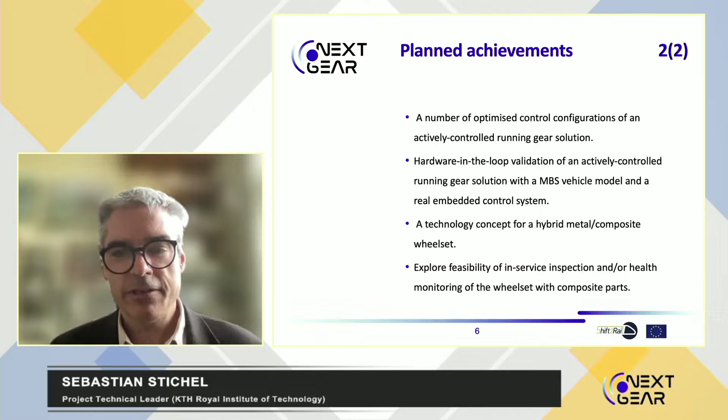The first one, the antenna bracket with additive manufacturing, gave a 60% weight reduction compared to an existing component. It's an example of how new manufacturing methods can provide shapes that are not possible with other manufacturing methods, and by that reducing weight significantly. That component has even been mounted, not only built but also mounted and tested on a Metro Madrid train. So regarding TRL, I would say we were definitely higher than 5 in that part.

Also, we developed, designed, and manufactured a carbon fiber composite frame, a second possibility for lightweighting, changing material in this case from steel to carbon fiber, and that frame is 50% lighter than a steel frame would have been. The third example, the hybrid metallic composite wheel set, promises even 60% weight reduction, an example of how more advanced materials could reduce the weight of future trains.

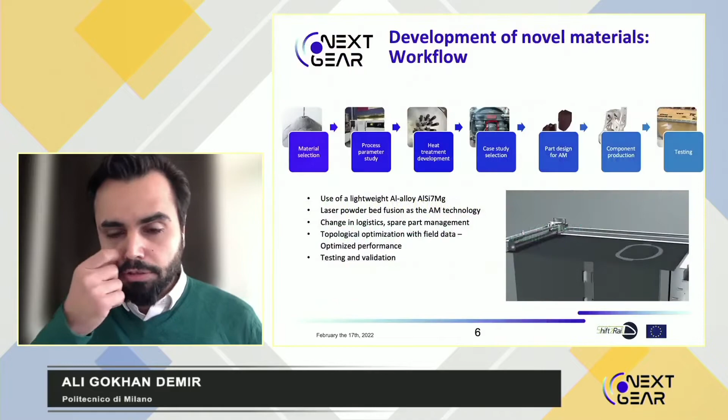In additive manufacturing, we have a lot of potential for different industries. In railways, these potentials have not been previously explored widely. One of the reasons is related to the fact that we have different stages of maturity in terms of materials available, manufacturing systems available, and the sizes of the components that we can make.

For that reason, the workflow of our task started from something different: the availability of the materials, the processes available, and then we set the scene for what we can do towards railway applications. This is why, in order to fulfill the requirements of our project, mainly related to achieving lightweight structures...

we went for aluminum alloys. We went for also arguably the most mature metal additive manufacturing technology, that is laser powder bed fusion, which you can see as an animation in this slide.

So we wanted to take our material, take our process, and develop a solution towards railway applications, which we found that the most suitable case for us was the spare parts. So for that reason, we wanted to see how much additive manufacturing could contribute in order to change the logistics, especially for producing these spare parts on demand.

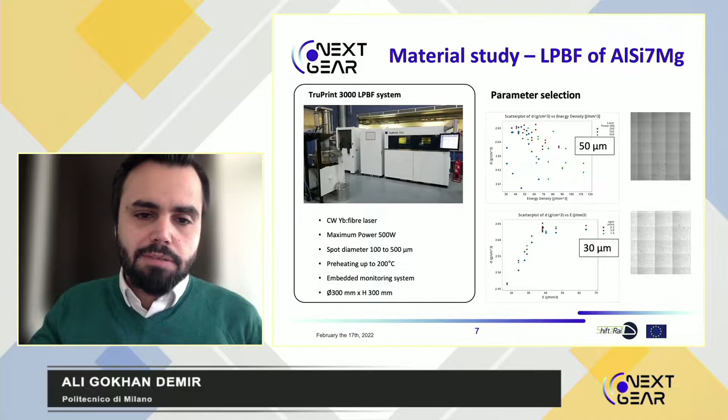So what we have done is also related to identifying a production cycle. In metal additive manufacturing, you essentially need to produce the part, and you need to also apply some post-processing. In terms of post-processing, we had to study the heat treatments.

Heat treatment is also a critical point in logistics. The idea is that if you produce a part where you need, or if you think about centralizing manufacturing, a heat treatment might be very tricky because of the size of the component, because of the furnaces that you need, and so on. So together with our colleagues in Rome, CSM RINA, we studied a novel heat treatment for the railways industry.

The idea was to make a heat treatment applicable to a decentralized manufacturing scheme that doesn't compromise the mechanical properties of the components that you make. Also considering the fact that we're going towards mid to large-sized parts for metal additive manufacturing, we don't want part distortions or any geometrical failures during the heat treatment.

For that reason, we studied a large experimental campaign for heat treatment process parameters. We varied the layer thickness, as I said before, and my colleagues in Rome studied new recipes for heat treatments of this alloy.

Going quickly into the details, my colleagues in Rome, together with us, studied the heat treatment options, starting from a standard aluminum alloy heat treatment, a T6, which could be applicable to conventional aluminum alloys. It considers a quenching process in water, which might be somehow detrimental for large parts that might bend and get distorted during this process.

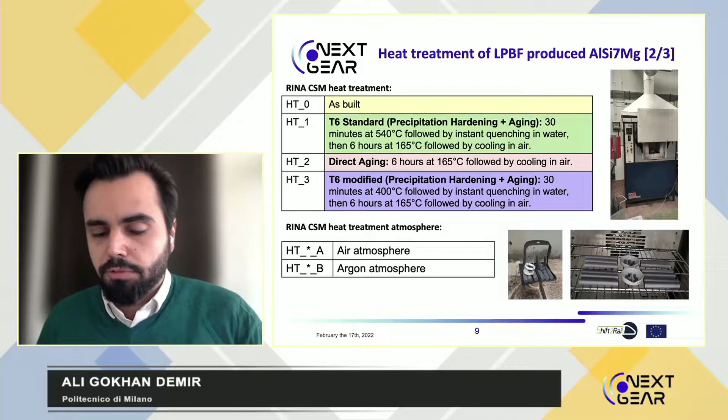They also considered a direct aging treatment and a modified T6 treatment. You can see the process parameters in detail, but the idea was aiming for adequate mechanical properties while trying to figure out a way to make the whole heat treatment process easier for decentralized manufacturing. We also considered whether we could reduce the gas consumption during the heat treatment, whether we can do this in air atmosphere or in argon atmosphere, which would potentially increase the costs.

Going into the final recipe of manufacturing this alloy for railway applications, we decided to go for quicker manufacturing in laser powder bed fusion by increasing the layer thickness, because we found out that the mechanical properties were still adequate after a heat treatment in air atmosphere.

The heat treatment was a direct aging heat treatment, where my colleagues showed the mechanical properties were very good. The post-processing time was reduced, and we avoided quenching, which is potentially good for the distortions that might happen during heat treatment. So this is one of the achievements of our task: we tailored the heat treatment for railway parts produced by metal additive manufacturing.

We then studied different parts which we could produce by laser powder bed fusion technology. Our colleagues in Metro de Madrid provided us with 7 different cases, and the first limiting factor was the size of the components. Here you see the way we tested these components in a virtual world to see whether we could produce them with the process and machine that we have.

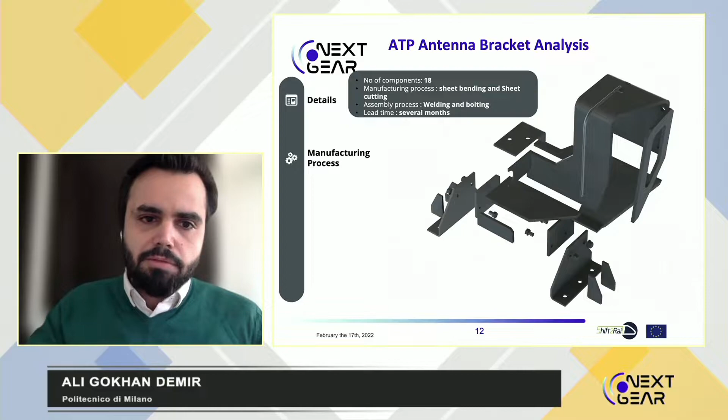I will go through the stages of how this part was and what it became by the end of the task. Our part is something hidden within the train. It is made of steel, weighs 26.2 kilograms, and is made using very conventional manufacturing techniques — sheet bending, cutting, welding, and bolting. We have 18 components in order to manufacture this part.

So the idea is we took this part, used the actual vibration and acceleration data of the train, and transferred them into load cases. The load cases were used to understand how the part was actually behaving under these loads, and finite element modeling allowed us to see the benchmark.

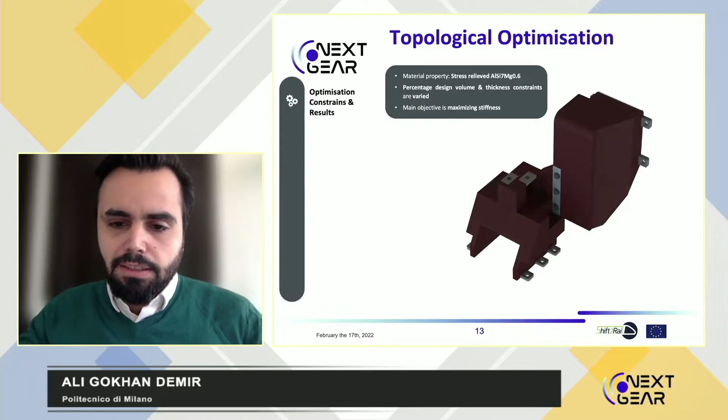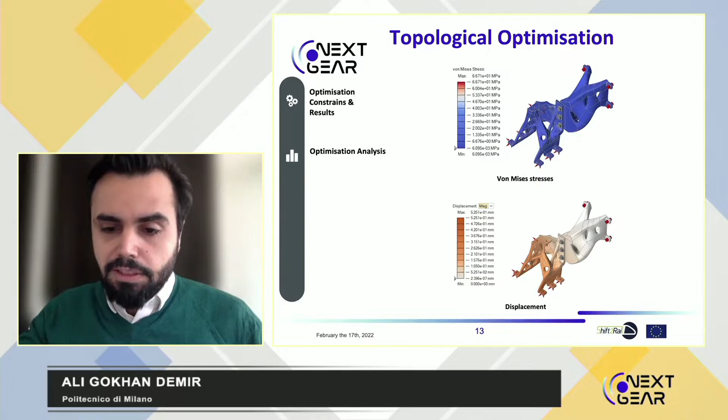Then we took the part and defined our constraints in terms of how many parts we want, the assembly joints, and so on, using this design region to go for a topological optimization. Topological optimization matches very nicely with laser powder bed fusion, but the optimization results are not really optimal for production. So we had to continue the design with modifications, and the final design was once again tested in finite element modeling, allowing us to see that we maintained stiffness while reducing the weight quite significantly.

Last but not least, the part was also modified for manufacturability by laser powder bed fusion. We made some basic modifications in order to make the part producible as fast as possible.

This is the digital image of the part that we designed, and this was manufactured in Milan. So putting everything together, original compared to AM, at least on a calculation basis, we saved

60% of weight. We reduced the parts to be assembled from 18 to 2. From design to manufacturing, we reduced the time from several months to a few weeks. And essentially, we made a part that was better than the conventional one, at least in terms of how it was designed.

So another achievement is that we designed a spare part for the railways industry, which was topologically optimized. I'm going to go through some of these testing results rather quickly, because this somehow exceeded our expectations during the project.

So once the part was made - and maybe I should also mention that this was through the pandemic - we also found out once again that additive manufacturing adds resilience to logistics and manufacturing overall.

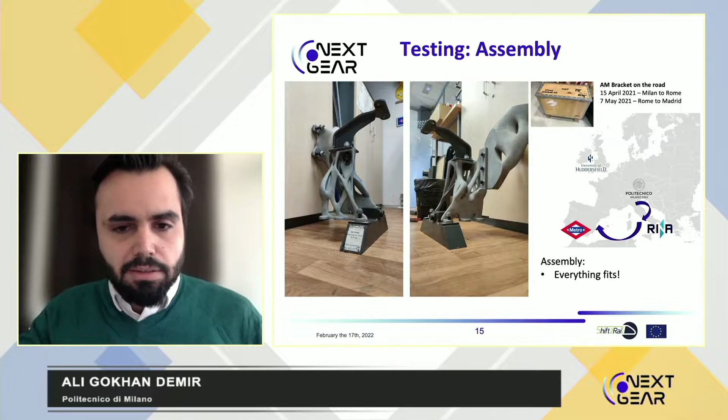Then the static testing was applied by our colleagues in Madrid, pulling our antenna brackets statically in different directions. First of all, very humbly, we needed to see if anything broke. Nothing broke, which was very good.

Then we gathered the data in terms of displacement and stiffness of the part, and we compared it with our calculations. And this was the validation of our part in a static way.

The very nice thing about NextGear as a project is that the partners are very enthusiastic about what we have been doing. We didn't stop. Very recently, the part was also tested on track, which is an amazing opportunity for all of us.

In Madrid, our colleagues mounted the new antenna bracket together with the conventional one. We gathered vibration data on both of them, and we are still comparing these results for future communications coming out from this task.

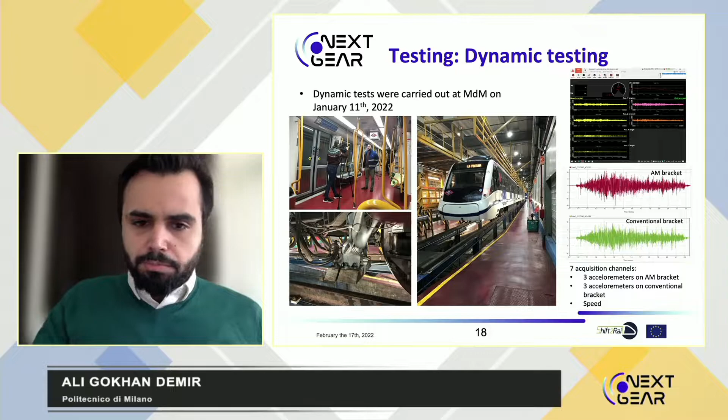So, last but not least, this is just to show where we started and where we came to. The last achievement, I would say, is that we were able to actually start from scratch, make a real railway spare part, calculate it, manufacture it by additive manufacturing, and verify it.

Thank you very much.

Really interesting piece of work there, developing a real product that is now being tested and hopefully will start to be used. Okay, so the next section will be presented by Per Wennhage. Per is going to describe the composite frame which was manufactured.

Thanks, Per. KTH. Sorry, second one to make the mistake with the muting.

My name is Per Wennhage. I am an associate professor at the Royal Institute of Technology in Stockholm, in lightweight structures. I have been leading this subtask of the composite frame, and I will share with you some of the results from our side.

So the partners in this subtask have been, apart from us, Huddersfield, RINA, Metro de Madrid, and Bercella. Bercella is an Italian company, a manufacturer of composite structures.

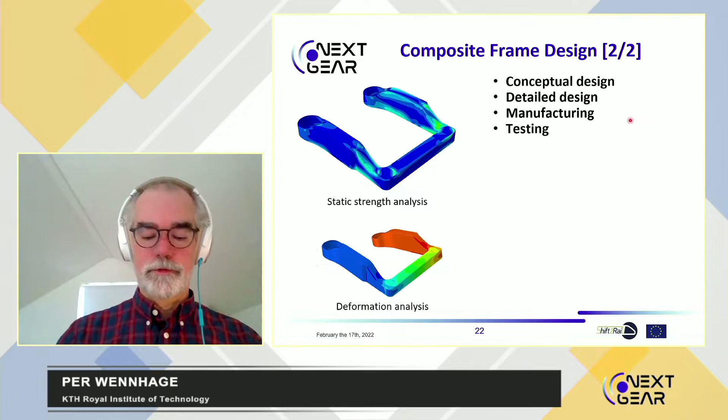Quite a lot of simulations were also made together with the vehicle dynamics simulations, where we could see how the frame works together with the other suspension components to contribute to safety and comfort in the vehicle.

After this, the design was determined and we had a manufacturing plan. This was done by Bercella in Italy, and it was a 3-stage process. This included a fairly large mold where the frame was first manufactured. Inside this blue area is the shape of the frame, and carbon fiber layers are placed inside and cured.

Then a number of metal inserts were used to introduce high loads for where the coil springs should be, in these buckets so to speak, and for different other attachments. The one on the far right, the metallic part, is for the introduction of fastening of the axle boxes. The idea is that all this metal part is embedded into the carbon fiber, but there are protruding elements that provide a metal-to-metal interface for bolting the axle box.

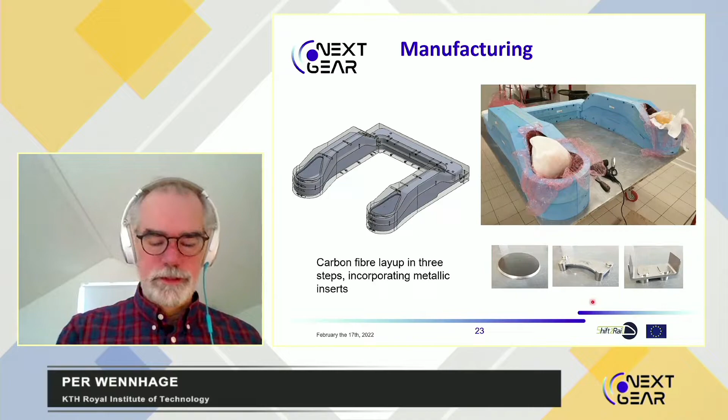The frame was shipped to our lab in Stockholm for testing. This is my colleague Anton, who did most of the analysis and also major parts of the testing, which we did together. The final component weighs in at 76.5 kilograms, which makes it manageable for 2 people to carry around the lab.

It was quite nice - slightly above the calculated weight, which is not unusual for a first composite prototype, but within limits. We compensated for this in the models we used to verify the structure.

A test program was set up to verify the frame's properties. We wanted to characterize the structural flexibility and particularly the torsional stiffness of the frame, because we wanted it to be able to act as an anti-roll bar. So it shouldn't be super stiff, but at the same time, under other load conditions, it should be stiff. We wanted to see if we had managed to do this with the design.

We also wanted to see that all the finite element models we had were accurate and modeling the right thing. To verify that we could take the loads, we designed it to operational loads taken actually from standards for rail vehicles that are being used today.

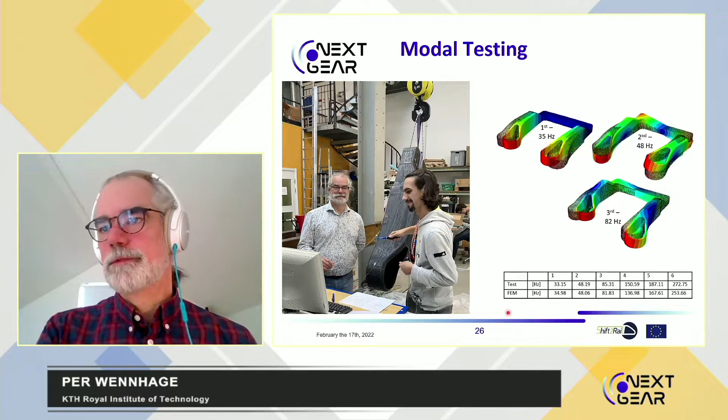And the results were really encouraging. We could see that at least for these first modes, these results are really, really good. After that, the different tests commenced, and typically the procedure was that we set up a test. This is for vertical testing.

We have a load point at the middle of the orange colored beam that will press down with a hydraulic cylinder, and then we measure the displacement at a lot of different positions. We pick out the same position in the finite element model, where we make a model of this particular test, so we can get a fair comparison. There are a lot of measurement devices here that measure displacement at different points so that we can subtract any rigid motions of the frame during the test.

This was an initial vertical test to about a quarter of the maximum load, and as you can see, the agreement is quite good.

Then we did a twisting test where we loaded a quarter of the frame and the other parts were restrained. This is to simulate the action of an anti-roll bar, to see if we got the stiffness right. Again, the finite element model we used was a model of the actual test, the way it looked here. As you can see, the results are also really encouraging. It may be slightly stiffer than anticipated, but not way off, so we were very happy with this.

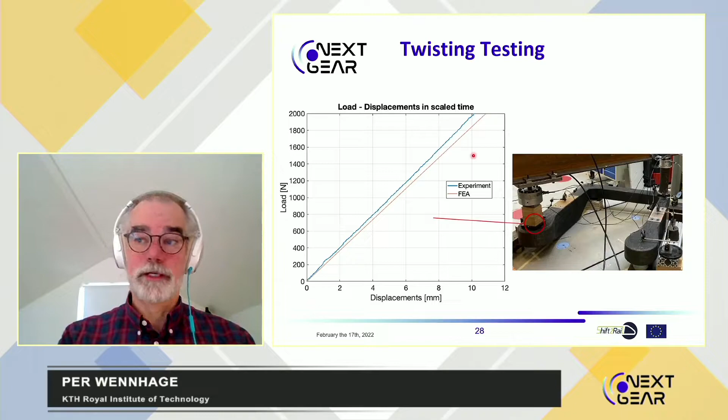The final test we did was to load it vertically to the design load. We did this last to be sure we didn't break anything before the others. So we loaded it to a total load of 20 tons, as if it was mounted on the vehicle — this is the vertical compression case.

You can sometimes hear when a composite structure is about to break, some cracking. I didn't hear any cracking at all around this one. My hearing is quite good, actually, so I couldn't hear any cracking here.

So what you see here is Anton, again, applying the load to the frame carefully and slowly. I'm standing in the background in a typical supervisor pose, surrounded by my PhD students. This is always an event in our lab when we test something big. On a completely different note about lightweighting, I've probably lost 16 kilos since this picture was taken, and my weight is now the same as the composite frame, actually. Funny.

You see the results here match the finite elements really well, almost all the way up. We had a little bit of a problem with interference on one of the measurement devices, so it deviates a little towards higher loads here, but we measured on both right and left side, and on the other side it looks really fine.

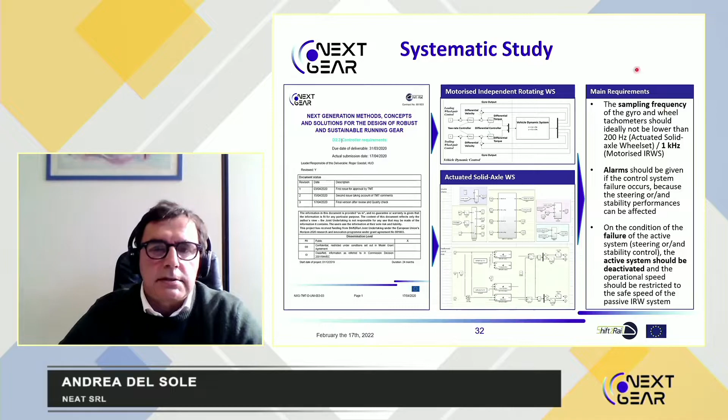Another redundant system, with two different halves of the system, will be shown in the video that will be streamed during the break.

There is also an ancillary communication computer running a dedicated Linux distribution in charge of non-critical tasks, and of course the power supply unit. A lot of tailoring has been done, especially on our operating system, in order to achieve the required 1 kilohertz duty cycle, which, to the best of our knowledge, is absolutely uncommon in railway applications.

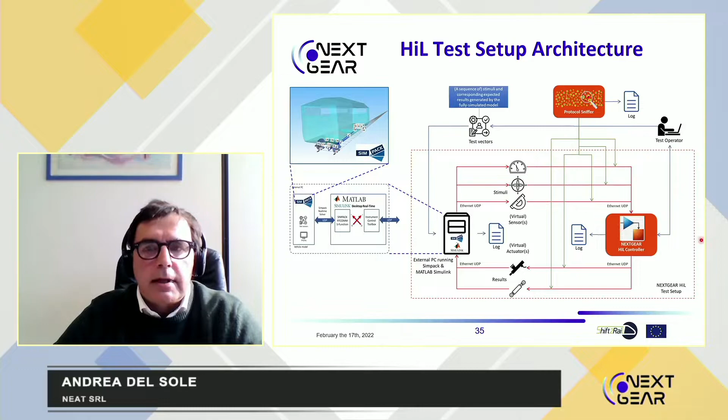This is the real setup: we have the PC and, on the right, the controller connected through an Ethernet port. We access this setup remotely, so we can run different test campaigns from our premises or anywhere.

The testing strategy we followed is based on three different simulations to compare vehicle dynamic results, given the track case of curve negotiation, where the truck approaches the curve. We compared three systems: a passive one with no control, an active one with the designed Simulink controller, and an active one with the hardware-in-the-loop physical controller in the middle. These are the results for the wheel set attack angle across the three simulations.

Both wheel sets of the passive vehicle system show very large attack angle during curve negotiation, whereas the controlled leading wheel set in both active cases has a much smaller attack angle compared with the passive one. The trailing wheel set without control has almost the same attack angle as the passive one.

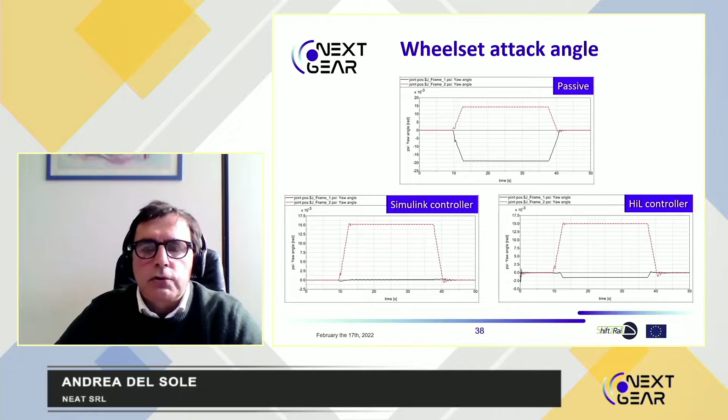The wear of the controlled leading wheel set is significantly lower than in the passive scenario, and the simulation shows that the wear index can be reduced by up to 94%.

In contrast, the uncontrolled trailing axle, wheelset 2, has almost the same wear index as the passive vehicle. So this improvement in the vehicle dynamic performance of the controlled leading wheelset is quite significant according to our analysis.

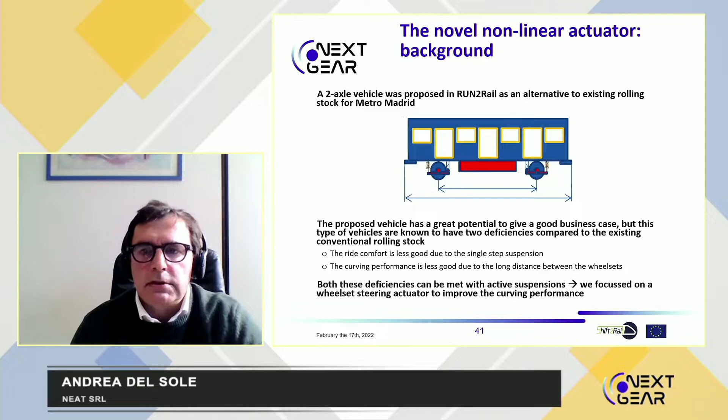Let's now move on to presenting the results for the actuator. In the Run2Rail project that preceded our NextGear project, a two-axle vehicle was proposed as an alternative to the rolling stock currently used in Metro de Madrid. This vehicle, despite having great potential from the business point of view, has possible deficiencies in ride comfort and curving performance, which could be overcome, in our opinion, by introducing wheelset steering actuators. This is what we are talking about now.

Here we are showing the basic steering principle. The goal is to obtain a favorable angle for the wheelset in curves and thus reduce wear, and in general, not to control stability.

This is the test setup for the actuator. On the right there is the diagram, and on the left, the real setup in the laboratory. On the bottom we can see the control diagram showing the principle of functioning with a single driving circuit.

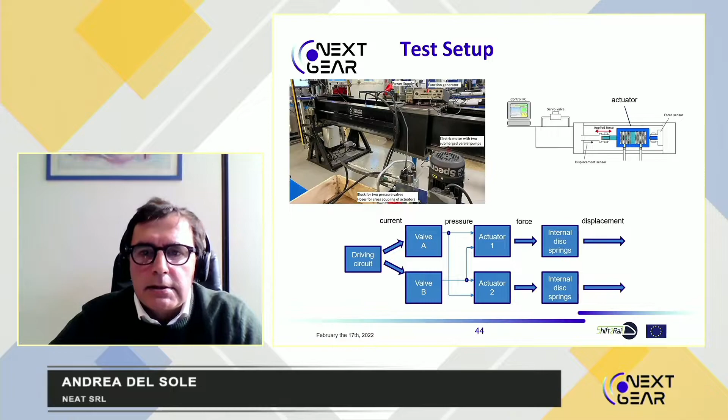A sophisticated model has also been designed, shown on the diagram on the left. Sorry, it's quite small, but it's complex, so it couldn't fit into a single slide. This model simulates the behavior of the actuator system, taking into proper consideration the friction elements and the connection bushing.

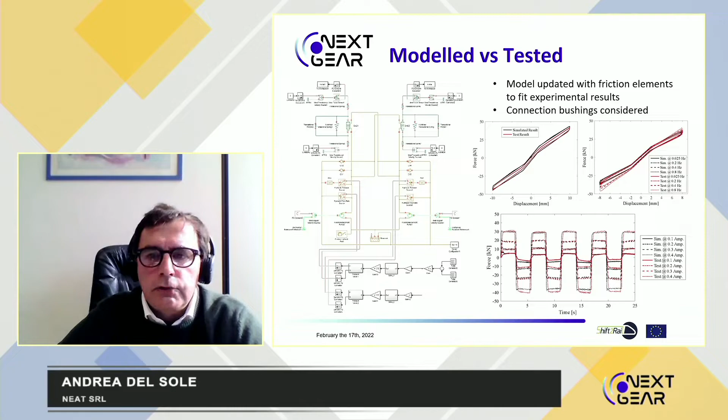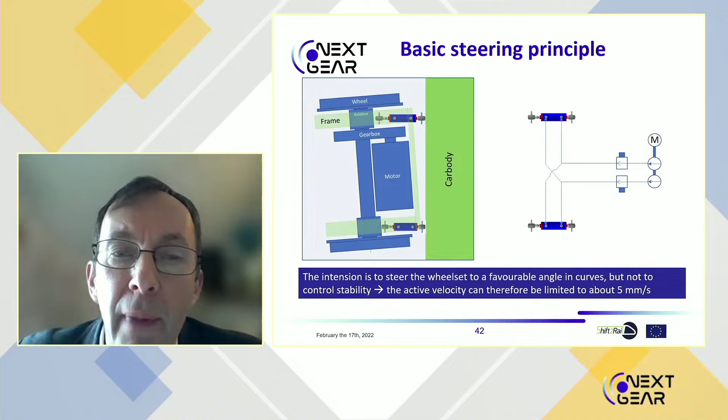But the question seems to be about the maximum forces, which, I'm sorry, I don't quite understand the point of the question. Maybe it's questioning whether the actuator can apply enough force, or whether we tested it to a high enough force in the testing.

Yeah, it's probably referring to the graph on slide 45, isn't it, where the force is going up to 45 kilonewtons in each direction. My feeling is that's enough force, but I'm sorry, I don't quite understand the question.

Perhaps can we take that offline? Yeah, I think it's better. In any case, there are no more questions.

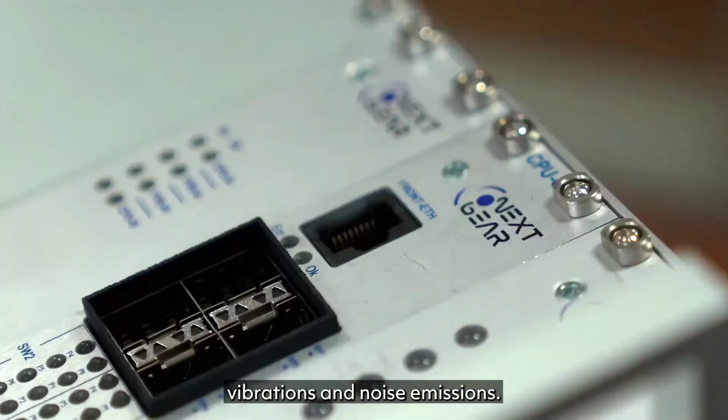A new generation of running gear is very important to achieve the ambitious goals set by Shift2Rail for future European rail vehicles. This includes significantly reduced life cycle costs, improved reliability and energy efficiency, and also reduced vibrations and noise emissions. NextGear therefore develops a variety of innovations for future running gear.

The reduction of the mass of the wheel set is related to the importance of reducing the mass of all the parts coming into contact with the track. This helps reduce the damage to the rolling stock and the rails, and also reduces the noise and vibration coming from the vehicle.

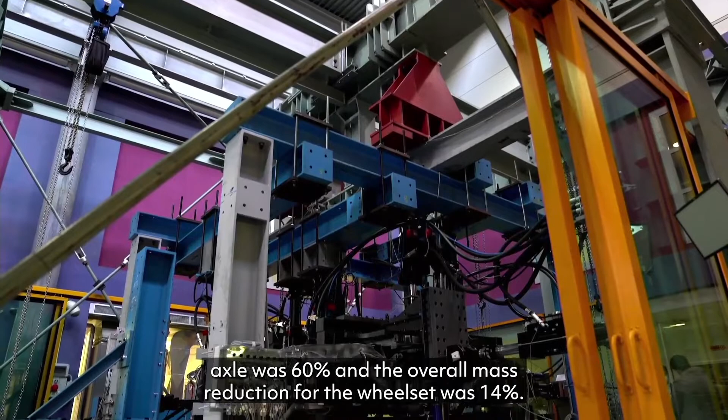In Work Package 3, we developed a technology concept of a hybrid metal composite axle. The weight reduction we achieved for the axle was 60%, and the overall mass reduction for the wheel set was 14%.

To develop this hybrid composite metal axle, we had to face a lot of challenges. First, we had to design the structure and optimize the fiber layup, then study the connection with the metal parts, the bearings, the wheels, and the position of the brakes. We also had to consider feasible ways of inspecting this complex part and performing structural health monitoring.

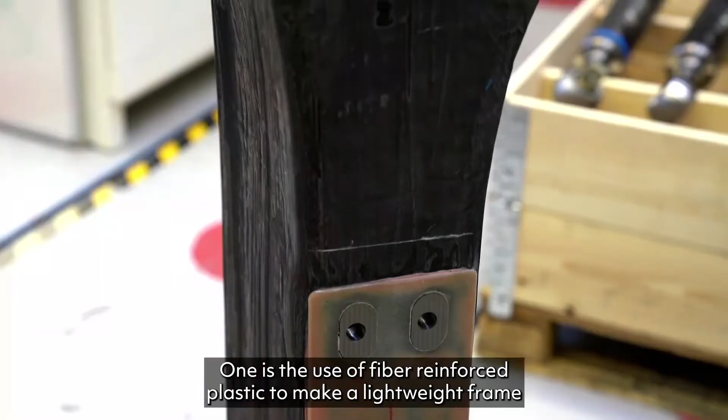There's huge potential from using new materials, new components, and new methods of operating these components. In Work Package 2, we've been investigating two potential improvements: one is the use of fiber reinforced plastic to make a lightweight frame within the bogie of the vehicle, and the other is use of additive manufacturing methods, where we make a novel component which is lighter, more robust, and potentially more reliable than existing components.

We are also developing a high safety integrity level controller. This controller is necessary so that we can control the different active components in the suspension. Using active components allows us to improve the performance of the suspension, for example by reducing damage on the track and reducing the energy consumption of the vehicle.

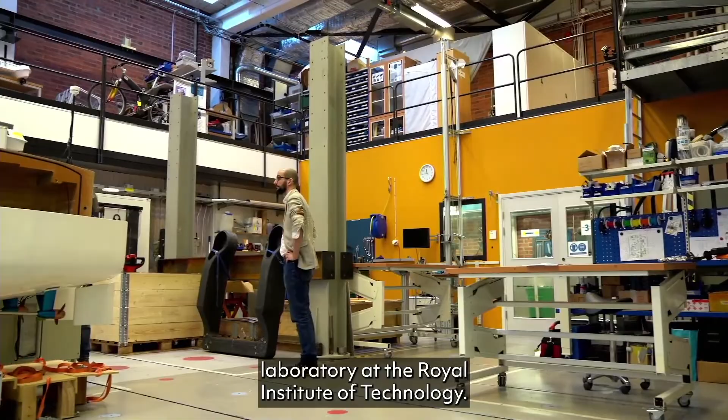A challenge in using composite materials in running gear is to prove that they can fulfill all the requirements on lightweight vehicle components. This has been addressed in Work Package 2 through the conceptualization and design of a lightweight carbon fiber frame, tested here in the Lightweight Structures Laboratory at the Royal Institute of Technology. The work has demonstrated that carbon fiber composites can be used as part of a novel running gear, achieving significantly reduced mass and better or similar performance to a conventional running gear.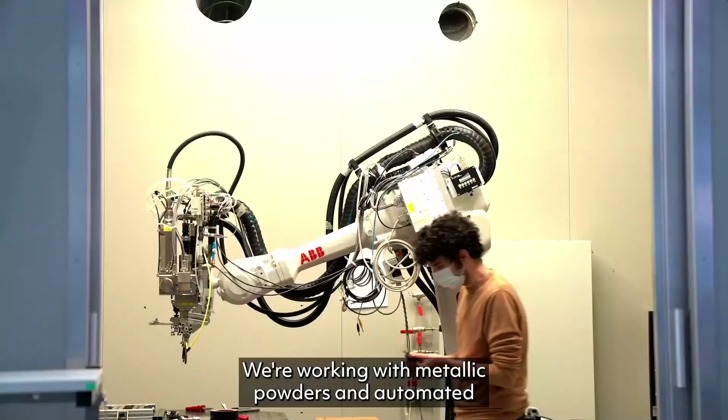Metal additive manufacturing can provide several benefits to the railway industry. We're working with metallic powders and automated machines to make parts in a layer-by-layer fashion. In NextGear, we concentrated our efforts on understanding how we could change the manufacturing of spare parts, especially where and when required, using digital files.

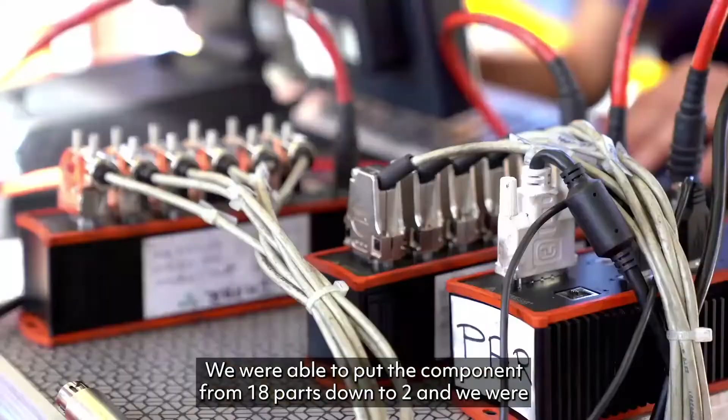We collaborated with Metro de Madrid and redesigned their part using real railway data. The component was manufactured here in Milan and tested on the track in Madrid. We achieved a 60% weight reduction of the component, and we were able to reduce it from 18 parts down to 2. We manufactured it in less than 2 weeks compared to a few months in the conventional case. This was a nice way of showing the railway industry the benefits of metal additive manufacturing, which we hope will be used more often in the upcoming years.

The use of active elements may lead to a better trim of the car body approaching curves by reducing centripetal acceleration, thus reducing wear on both wheels and tracks. The suspension system, both sensors and actuators, can be monitored to check efficiency and detect anomalies in their behavior. In the project, we set up a hardware-in-the-loop controller with simulated sensors and actuators running at 1 kHz. A future improvement could be introducing dedicated I/O boards interfacing real sensors and actuators.

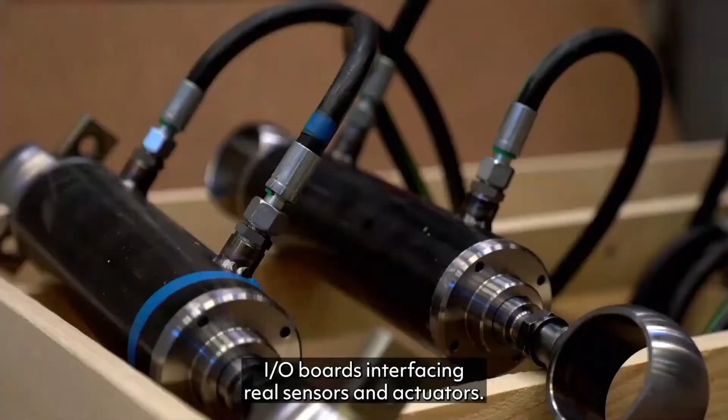The universal cost model is a simulation framework that enables comparison of life cycle costs of different running gear types, especially their impact on different railway system stakeholders. The UCM allows us to check the pros and cons of novel, innovative running gears at the system level. The UCM does not simulate the innovations directly, but simulates the impact of those innovations on different cost-generating concepts. This means that for the NextGear project, we could not model all the innovations.

Instead, we explained and broke down the process of how a new innovation should be implemented in the UCM in order to calculate its benefits, pros, and cons. The main challenge is to achieve the right balance between accuracy and user-friendliness, because different stakeholders have different expertise levels in these simulation techniques and different expectations of what a good level of accuracy and usability should be.

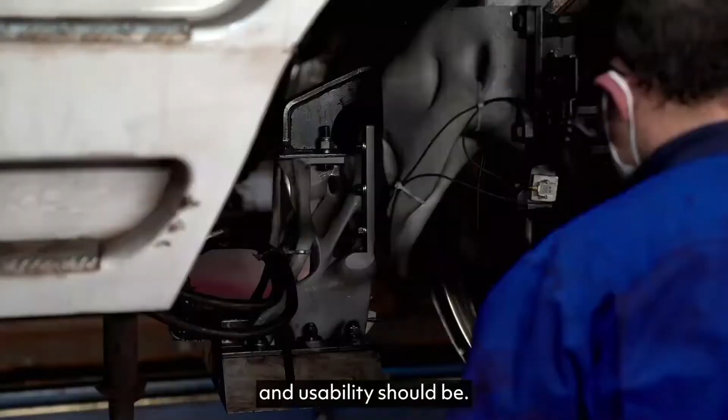Additive manufacturing and bogie frames and wheel sets based on carbon fiber materials can significantly reduce the weight of future running gear. The controller and the innovative actuator developed in the project show the performance of active suspension in rail vehicles, which will improve performance and enable new vehicle concepts. The positive impact on life cycle costs can be verified with the universal cost model also developed in the project.

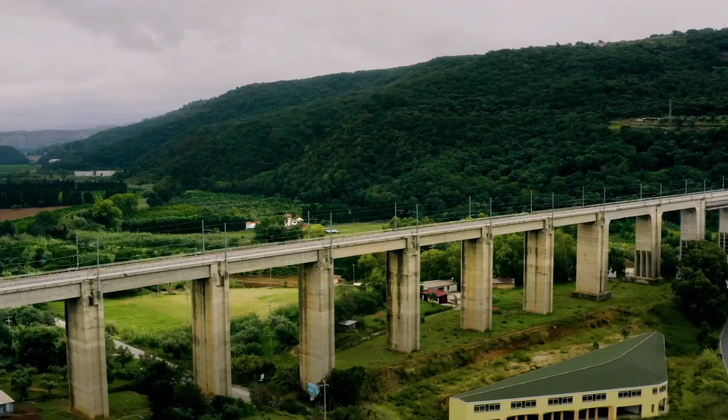A new generation of running gear is very important to achieve the ambitious goals set up by Shift2Rail for future European rail vehicles. This includes significantly reduced life cycle costs, improved reliability and energy efficiency, and also reduced vibrations and noise emissions.

NextGear therefore develops a variety of innovations for future running gear.

The reduction of the mass of the wheel set is related to the importance of reducing the mass of all the parts coming into contact with the track. This helps to reduce the damage of the rolling stock to the rails and also reduce the noise and vibration coming from the vehicle.

So in Work Package 3, we developed a technology concept of a hybrid metal composite axle. The weight reduction we achieved for the axle was 60%, and the overall mass reduction for the wheel set was 14%. To develop this hybrid composite metal axle, we had to face a lot of challenges.

First of all, we had to design the structure, we had to optimize the fiber layup, but then we had to study the connection with the metal parts.

And the connection with the bearings, the wheels, the position of the brakes. Then we had to consider feasible ways of inspecting these complex parts and also ways to perform structural health monitoring of the parts.

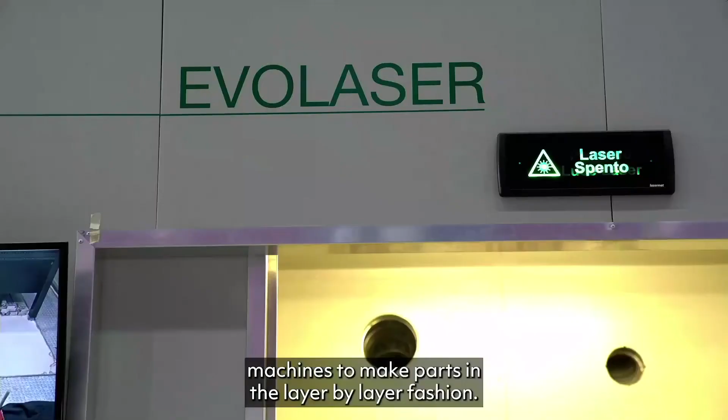Metal additive manufacturing can provide several benefits to the railway industry. We're working with metallic powders and automated machines to make parts in a layer-by-layer fashion. So in NextGear, we concentrated our efforts especially in order to understand how we could change the manufacturing of spare parts.

Especially where required and when required, using digital files. So we collaborated with Metro de Madrid and we redesigned their part using real railway data.

And the component was manufactured here in Milan and tested on the track in Madrid. So we achieved a 60% weight reduction of the component. We were able to bring the component from 18 parts down to 2.

And we were able to manufacture it in less than 2 weeks compared to a few months in the conventional case. So this was a quite nice way of showing the railway industry the benefits of metal additive manufacturing, which we hope will be used more often in the upcoming years.

The use of active elements may lead to a better trim of the car body approaching the curves by reducing the centripetal acceleration and thus reducing the wear of both wheels and tracks.

Moreover, the suspension system, both sensors and actuators, can be monitored to check the efficiency and detect anomalies in their behavior. In the project, we set up a hardware-in-the-loop controller with simulated sensors and actuators running at 1 kHz.

A future improvement could be introducing dedicated I/O boards interfacing real sensors and actuators.

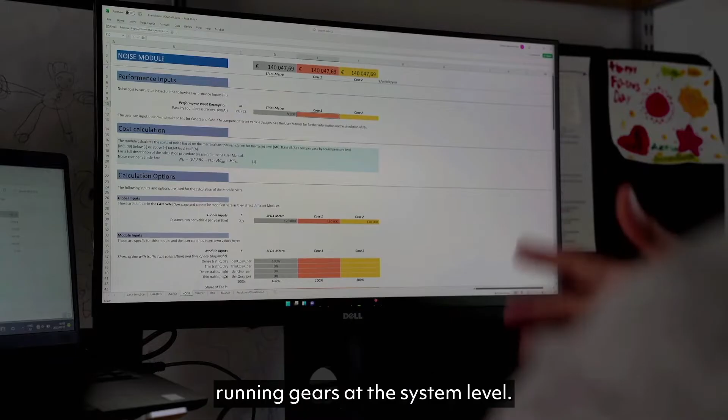The UCM does not simulate directly the innovations, but what it does is simulate the impact of those innovations in different cost-generating concepts.

For the NextGear project, we could not model all the innovations. What we have done is explain and break down the process and how a new innovation should be implemented in the UCM in order to calculate their benefits, pros and cons. The main challenge is to achieve the right balance between accuracy and user-friendliness, because different stakeholders will have different expertise levels in these simulation techniques and different expectations of what a good level of accuracy and usability should be.

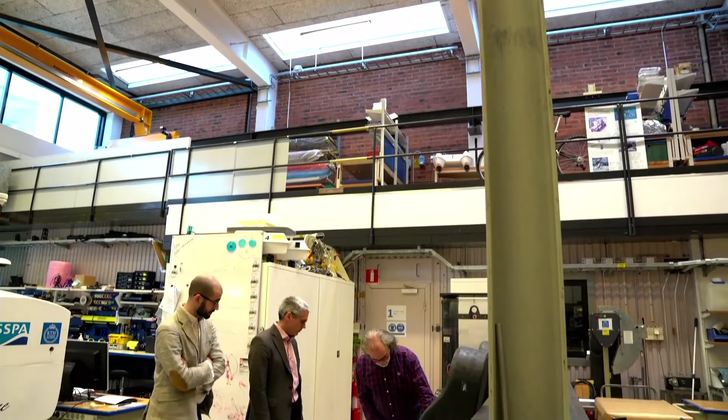Additive manufacturing and bogie frames and wheel sets based on carbon fiber materials can significantly reduce the weight of future running gear. The controller and the innovative actuator developed in the project show the performance of active suspension in rail vehicles, which will improve performance and enable new vehicle concepts. The positive impact on life cycle costs can be verified with the universal cost model also developed in the project.

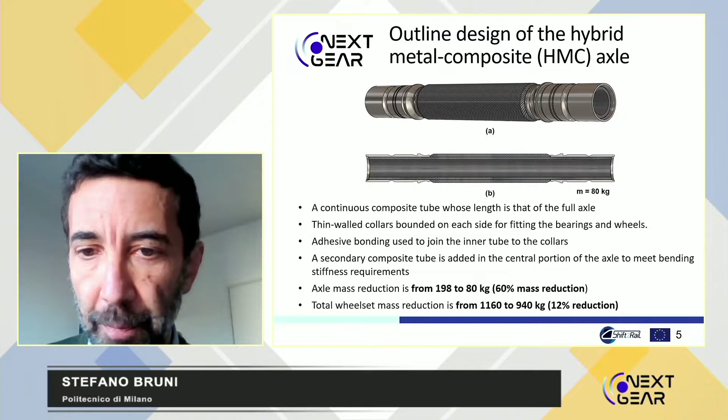And this picture shows how the complete concept for the wheel set with the hybrid metal composite axle, this acronym HMC standing for hybrid metal composite, looks like. So you see the composite tubes and the collars providing the bearing seats and the seats for the press fitting of the wheels, and then the wheels. You see the disc brakes are not shown, but you see where they would fit into the wheels.

So this was the first part of our work, and then of course we wanted to analyze this concept and its feasibility by looking into different areas.

The first one was a detailed structural design of the axle and an optimization of the layup. Then we had to look into a proper solution for the bonded joint joining the metallic collars to the composite part of the axle. We had to investigate the manufacturing process and make sure that there is a suitable manufacturing process that can be used to produce this component, and also get an initial estimate of the manufacturing costs. One very important point was about non-destructive testing and structural health monitoring to check the structural integrity of the axle.

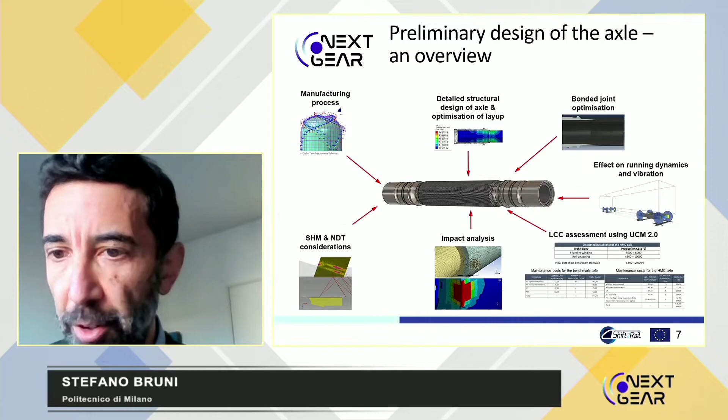Going a little bit more into the detail of the structure design and optimization, we came up with a detailed design for the steel collars. The philosophy here is to let the steel collar take all radial and circumferential stresses related to the press fit of the wheels and bearings, and leave to the composite only the role to bear the bending stresses and realize the required bending stiffness. We don't have much torsional stress in this case because this is a trailed wheel set, and at the same time the brakes are mounted on the wheels, so there is not much torsion being transmitted through the axle.

One important point was making sure that the hybrid metal composite axle could meet flexibility or bending stiffness targets, for which we used the steel axle as a reference. That was the part of our work where we realized that by just using the inner full-length composite tube, we would end up with a possibly too flexible axle. It may be a subject for further investigation whether one could accept this higher flexibility as long as it is not impacting the structural resistance of the material. Here, the problem was not really with the maximum stresses exceeding the limits, but rather with the maximum bend deformation exceeding some limits that we decided internally in our work.

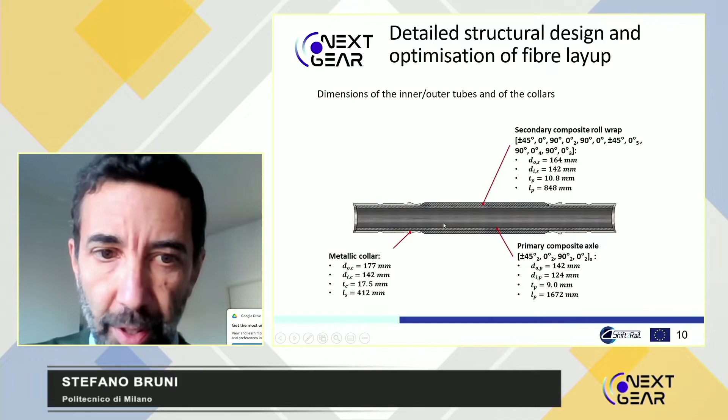Nevertheless, we could solve this issue by adding a secondary composite tube and by optimizing the layup of the primary inner tube and secondary outer tube in terms of the number of plies, thickness of the plies, and so on. This led us to a final, frozen design for the complete hybrid metal composite axle, which is summarized in this image, where you see basically the directions of the fibers, the thickness of the different components, and the main geometric properties.

In terms of the joining of the metallic collars to the primary and secondary tube, this was another very important and time-consuming part of our work because this is totally new, and of course we wanted to design a solution which is completely compatible with the stresses that need to be exchanged between the metallic and non-metallic parts in the axle. This was done by means of finite element models and finite element analysis. We found that it is particularly critical to ensure a smooth transition where the metallic collar transitions into the part of the axle which is only made of composite material.

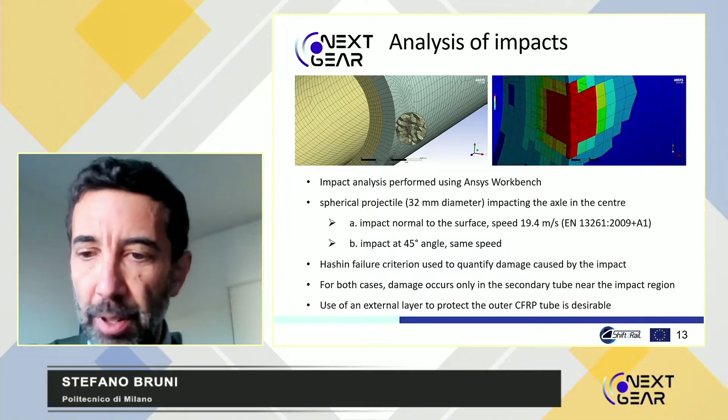we found that this would be certainly desirable. This is a solution that Lucchini is already adopting in some cases for steel axles, like a non-metallic covering layer protecting the outer surface of the axle from impacts. So this could also be of interest in case a composite axle like this one could be brought into service.

Another part of the work was related to the manufacturing process. Here there are basically two manufacturing methods that can be envisaged for this application. One is roll wrapping, so you have a sort of pre-impregnated fiber, which is wrapped over a mandrel to produce the tube, which is then cured and treated to produce the final composite part in the axle.

The other manufacturing method is filament winding. So by means of a kind of automation process or robotic system, filaments of carbon fibers are wound over a mandrel, and then the external parts are cut, producing the tube.

The benefit with roll wrapping is that because the stresses in the composite tube are mainly due to bending, roll wrapping allows the fibers to be aligned in the axial direction of the tube. This means there's a chance to maximize the stiffness over mass ratio, so you get the highest bending stiffness for a given mass of the tube.

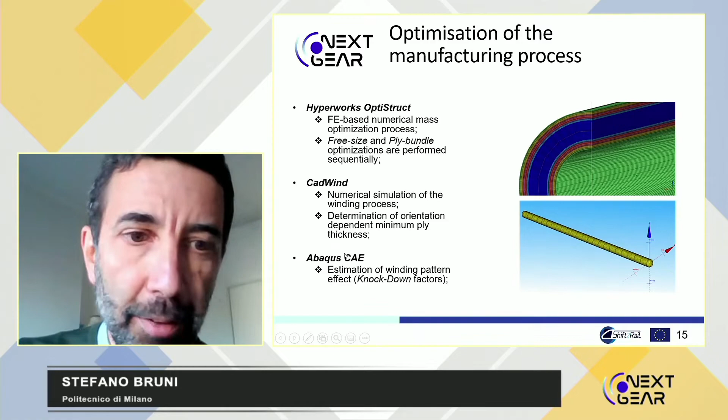So our work was to find out what could be the best filament winding process, which would provide a bending stiffness very close to the roll wrapping solution, yet enabling the use of this filament winding manufacturing process. This was done by a combination of optimization methods with HyperWorks, simulation of the winding process by a specific software CadWind, and finite element simulations.

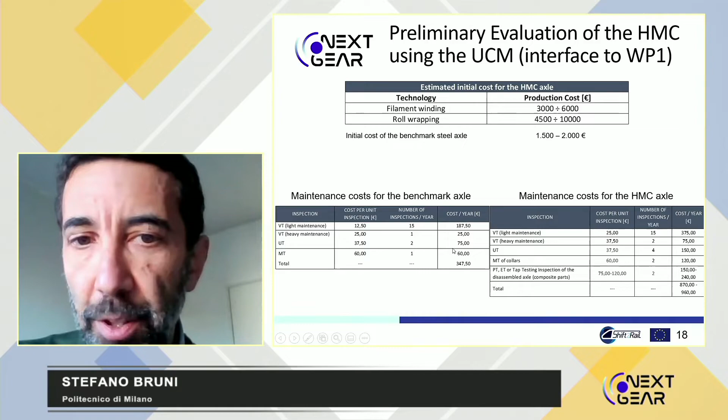We had an estimate of the production cost, split into two cases for filament winding and for roll wrapping, and you see that roll wrapping leads to a significantly higher cost. We also had an estimate for the initial cost of the steel axle—of course there is a difference, and this is unavoidable, but it's not a tremendous difference. We also had a complete evaluation of the difference and impact on maintenance costs on a yearly basis.

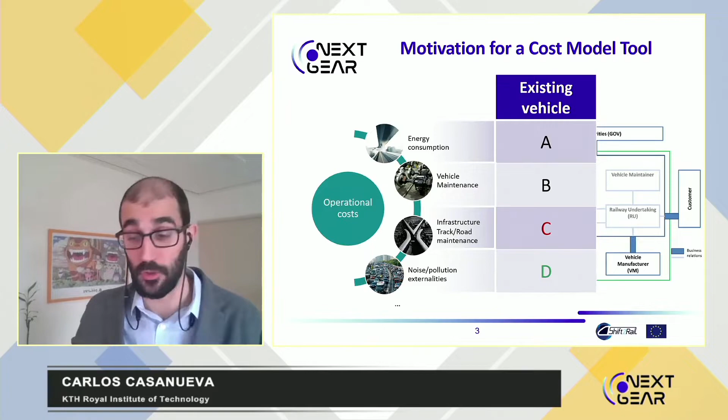So if you innovate and you have an innovative vehicle, you will definitely have different initial costs, different operational costs, and different end-of-life costs. That is rather simple in a way, except that those costs sometimes come to different stakeholders in the railway system. So an innovation can be paid by one stakeholder, but the impact is felt by different stakeholders. An example here is energy consumption or vehicle maintenance, which are usually costs assigned to operators, while infrastructure damage is a cost taken by the infrastructure managers, and noise and pollution are externalities or societal costs. So for these innovative vehicle benefits, one has to be able to evaluate these costs in a good way in order to justify these changes.

Now, exactly the UCM, the Universal Cost Model, was a methodology developed in Roll-to-Rail, and it is intended for evaluating how a discrete improvement or change in the running gear impacts the life cycle costs of the whole railway system. There are two parts to it: one is the methodology, and the other is the tool. The methodology covers the methods that you need to use in order to simulate the performance inputs, and the tool is how you transform those cost-generating inputs into actual costs.

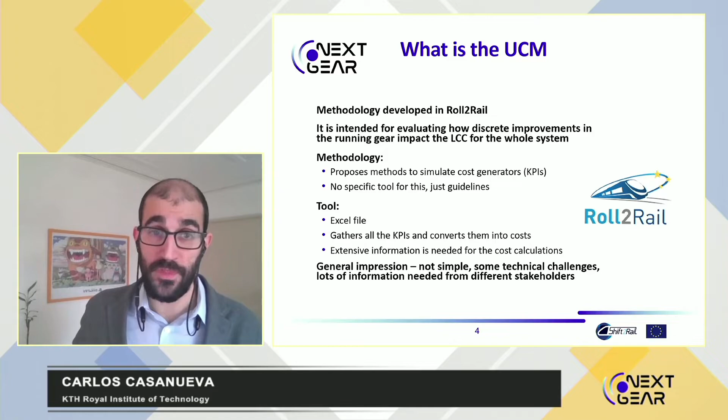The general impression from this project, or the feedback after Roll-to-Rail was finished, was that it was not a simple tool. There were some technical challenges, and there was a lot of information necessary for different people to be able to use it. So then, this is how it usually looks like.

The methodology is a set of rules and guidelines for simulations, and the tool is an Excel file. The interaction between those two is basically that there are some inputs to the simulations. The user should simulate some variables that are called performance inputs, and those performance inputs will be introduced in the tool in order to get a final set of costs.

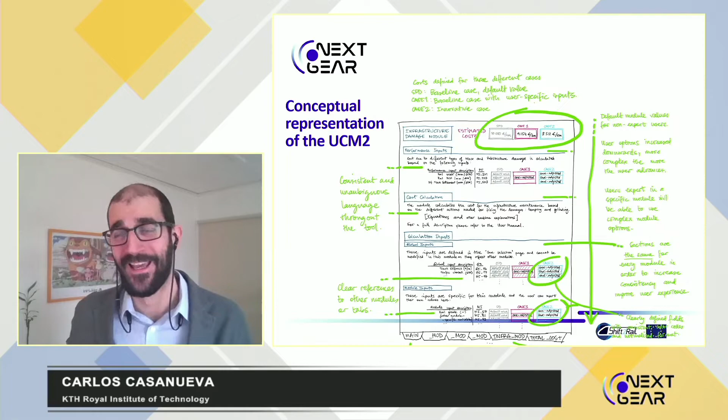Eventually what we did is try to conceptualize all that in one concept design, or conceptual representation, of what the UCM should be. And if COVID was good for something, it was for doing brainstorming workshops. We had to do this digitally with all the partners involved, and it was not easy. But we eventually came up with this conceptual design of the universal cost model, where we basically took the different things the partners were asking for systematically and tried to implement those in a sketch way.

So there are some main things here I would like to highlight. One is that the complexity of the modules was something addressed quite early, meaning that some people would be able to do stuff at a more complex level or not. So what we created is a way of adding complexity vertically, so that whenever one opens one of these modules for analyzing a subsystem, it can be used as is by default without changing anything.

But if one is an expert, they can go down and down and find more and more options that can be tweaked and used at a much more expert level. There is also a learning curve - there's a main initial tab and a final cost-gathering tab, but in between there are all the different modules of the different technical parts of the system. We ordered them so that the easiest modules come first and the most complex ones come at the end, so that one can learn as they go.

And the main thing is this comparison availability. In the previous version, you only got one result. We allow users to implement 3 cases. One of them is a default SPD case. SPDs are system platform demonstrators that come from the whole Shift2Rail framework, from Impact.

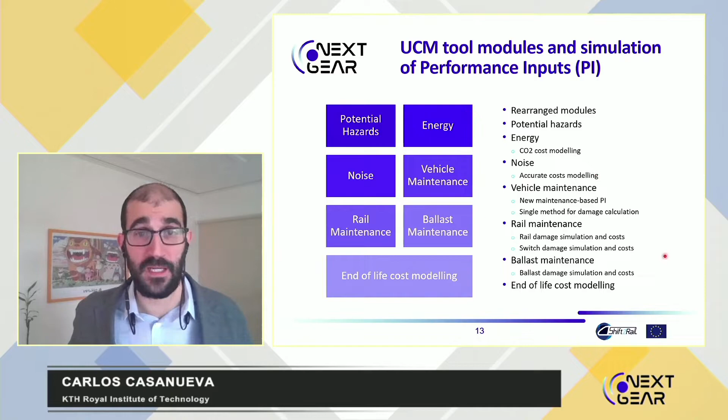We have different modules, I'm listing them here: potential hazards, energy, noise, vehicle maintenance, rail maintenance on one side and ballast on the other side, so they are separated for the infrastructure, and then a final end of life and cost modeling tab. We rearranged them a little bit in order to make them simpler. We added some things that I will go through right now, one by one.

The first one that I would like to address is the energy and noise modules, and there are no changes in the simulation models in those cases, but the economic analysis, or how you calculate the costs from those, have been improved a lot.

So for instance, the CO2 cost or the greenhouse gas emissions costs have been addressed as recommended by the European Commission handbook on external costs for transport. For noise, that's also been used in order to be able to address different costs in different areas and different times of the day, so that the nuances of the cost model can be implemented there.

Then, in general, wheel and rail damage are something that's kind of the same in a way, right? They both share the interface, and damage calculation is quite similar from one to another. The first thing we did there was to change the performance inputs to some performance inputs that are maintenance-based. That way, we had reprofiling or grinding depth and reprofiling or grinding frequency as inputs in the Excel file. And that makes the Excel file much less complicated compared to the previous one.

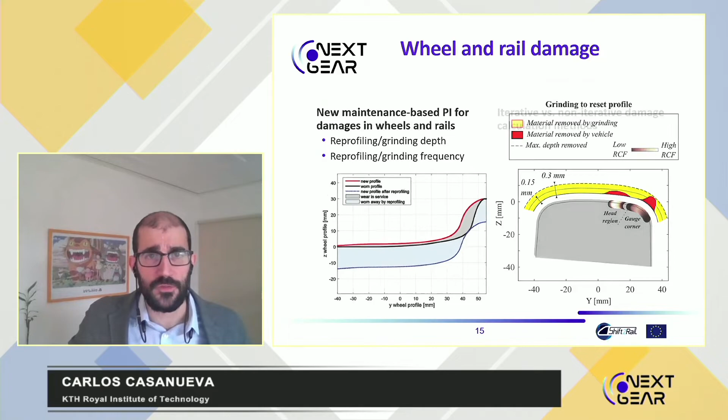I will start first with the vehicle maintenance part. One of the biggest issues in the previous model was that there were several proposed methodologies for RCF and wear calculation, and that gave a very big spread of results.

So one decision that we made in order to select a single modeling method was basically to stick to one and use only that one. In order to simplify the implementation of that method, what we did was we created a damage calculation package, a small MATLAB file that is provided for whoever needs to do these calculations, to use that exact package that basically analyzes one contact patch and, with the inputs from dynamic simulations, can give you the damage.

Both wear and RCF damage. That way we ensure that everyone using the damage calculation part is using exactly the same models, methods, calibrated against the same parameters, so that the final results are comparable.

There is one point that is quite discussion-intensive, which is whether the method for calculating damage is an iterative method, meaning that we update the profile as we go, or if it's a non-iterative one. We went for an iterative method, but there are of course pros and cons for both approaches.

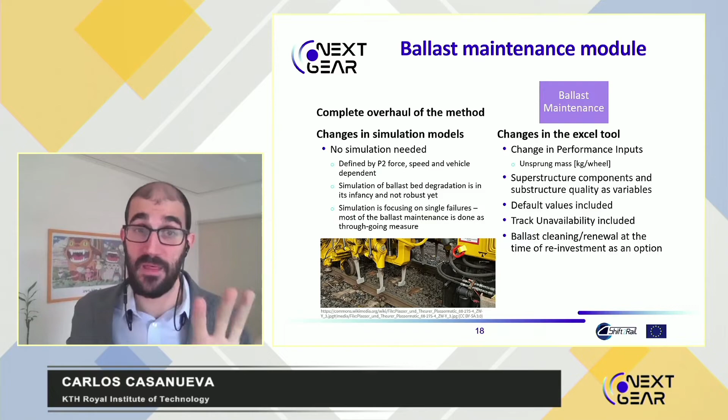So there is, of course, some follow-up that is needed in this part, but there is a method already implemented. The other part is rail, and the first part is grinding. It's similar to the wheel reprofiling part, except that here we could implement a non-iterative method. The geometry is much more simple for rails than for wheels, so the grinding, compared to reprofiling, can be done with a non-iterative method, and that simplifies a little bit more the already complex way of calculating damage.

Apart from that, the main change or the main introduction in this new model is switches and crossings. And with that, I would like to give the word to Yann Bezin.

Yes, thank you, Carlos. So I will share my screen. Okay, so good morning, everybody. My name is Yann Bezin. I'm working for the University of Huddersfield, and I will talk about the switch and crossing part of the module.

The interesting aspect is that, as Carlos was saying, the way we started is that in Roll2Rail, the switch and crossing aspect was not accounted for. So we started really from a blank sheet of paper here, which was interesting. The first thing was to consider what type of damages we were interested in, and therefore what type of costs. There are things associated with the way the support and the ballast is costed in terms of switches and crossings, and that's integrated into the ballast side of the UCM indirectly as an aggregate for a line intervention.

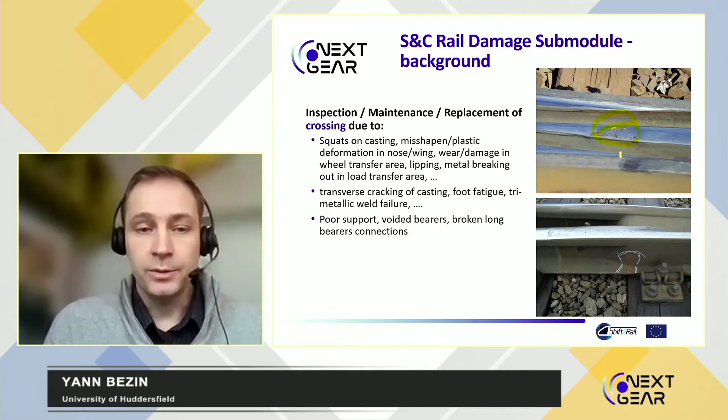Eventually, you also get some poor ballast support, and this influences the cost in terms of the rail, because you eventually go into fatigue cracks potentially and broken elements that you then need to replace. So we've considered the crossing repairs and replacements. Eventually, all these things relate really to how the wheel-rail interaction occurs in the switches and crossings, and how the vehicle interacts with those elements. So this is obviously of interest.

In terms of simulating or predicting the behavior of vehicles in switches and crossings, we can do that fairly accurately. We recently published an international benchmark on how to do this using established multi-body dynamic simulation software, and we've shown that we can get good agreement between all the different software. However, it still remains a very complicated task with a fairly high level of expertise required from the MBS user, and it is very time consuming.

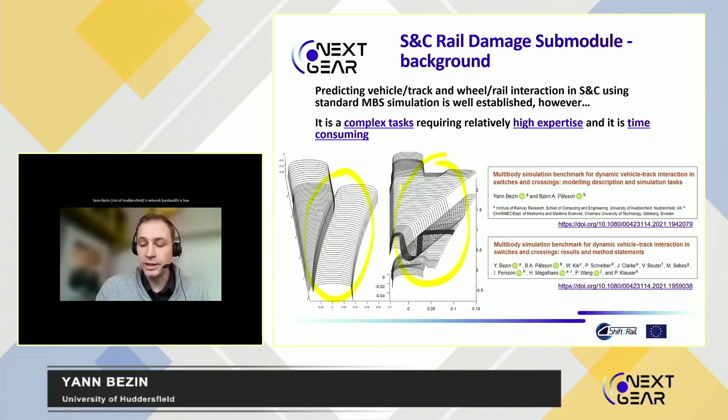The main thing is that you have to deal with variable shapes in the rails, in the crossing and the switch, and that takes a lot of time to implement, and it can lead to a lot of errors as you do it. So we wanted to try and aim for simplifications, while still being able to assess the vehicle behavior.

So the methodology that was used, we considered two approaches to try and estimate how the vehicle behaves in a switch. The first approach is obviously using the multi-body dynamic simulation, and then try and identify if there are any simple analytical formulas or rules that already exist and are being used, or some that we can actually draw and replace the multi-body dynamics with something more simple.

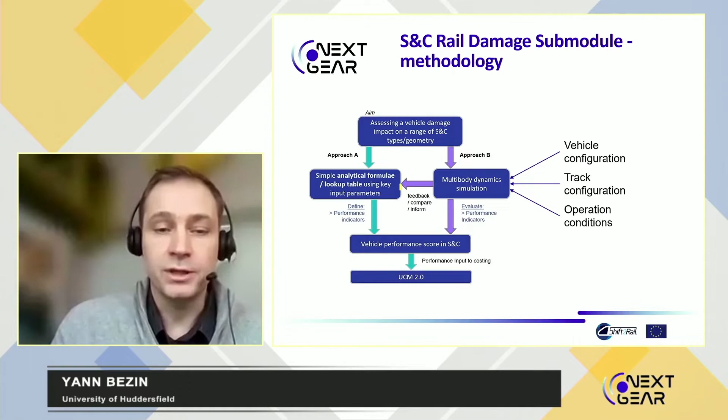Through the multi-body dynamic simulation, we can evaluate the vehicle behavior through different configurations, like accounting for the innovations that were presented this morning. We can also change the track configuration and the operating condition and evaluate quite a large mix of conditions. Then we can evaluate the vehicle performance in terms of how it produces those damages I was showing before, and then see how we integrate this into the UCM.

So in terms of what we decided to do, we try, as I say, with a goal of simplifying things. The main thing that the vehicle does when it goes for a turnout is that it has to steer from one track to another. And the ability of that vehicle to steer will generate more or less greater forces onto the rails.

So we simplified the turnout negotiation with an S-curve, and we inspired ourselves from the EN 14363 Annex F, which tests the vehicle in a fairly tight turnout to look at the imposed forces in curving. And we've done that simplifying, not accounting for the variability of the rail. So we're just looking purely at the ability of that vehicle to steer through that curve.

In terms of local forces occurring more locally in the switches, if you take a vehicle for a switch, you will generate some lateral forces as you come to the area where your wheel set will shift over from the stock rail on the left-hand side onto the switch rail. And that generates a lot of the damage I was showing before. This is the thing we want to capture.

So we've done a lot of simulation work through MBS simulation to show that the lateral force generated here correlates quite well with the damage that we're predicting.

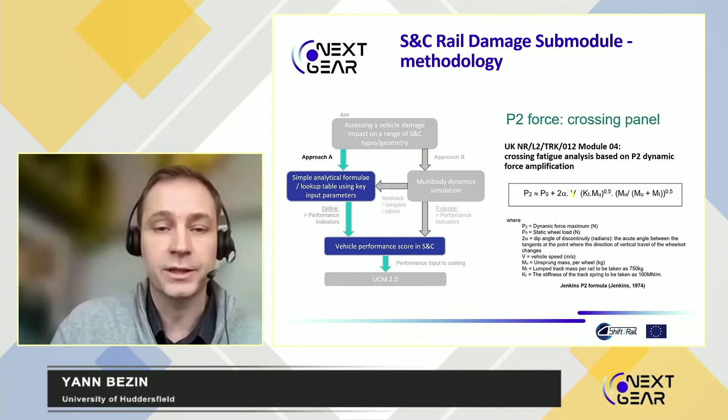So the scheme that we have effectively is that on the top, we are doing some calculation and simulation, and then we reach back at the bottom where we end up with our UCM performance input.

And on the left-hand side, we have the analytical solution with the P2 force that goes and feeds into the crossing replacement activities and the crossing weld repairs.

In terms of the simulation, the interesting thing is that we can use the complete vehicle multi-body system model. So everything that you have in your model will then trigger the intensity of that intervention that I was showing before. So suspension properties, mass effect from the axle or other part of the system will be accounted for.

We focus the simulation on the diverging route in each case, and that implies a certain level of damage on the through route as well, but we don't have to simulate it. We've shown that they correlate. In terms of the P2 force in the crossing, the key driver is the wheel set and unsprung mass. We account for the range of speed the vehicle will go through on the network, as well as the diverging speed, and that feeds into an average value.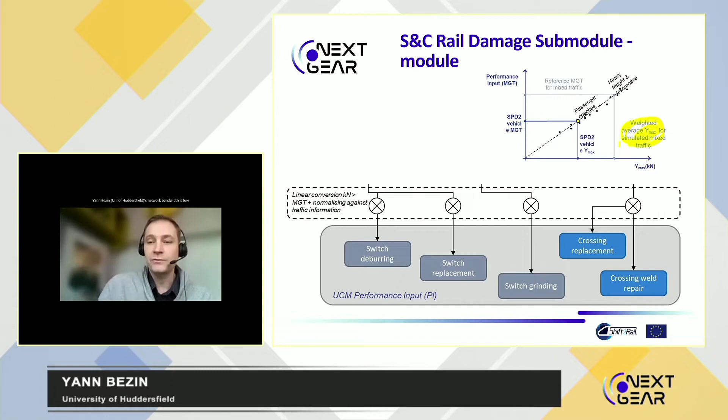We explored that and used some reference values provided by TU Graz in this exercise from a mixed traffic network. We did a lot of simulation to find out our weighted average for a certain range of vehicles, including heavy freight locomotives and passenger coaches, and that relates to a certain intervention in terms of million gross ton interval to produce that maintenance.

The user, through the UCM, can either use the proposed SPD values provided as a reference, or simulate their own values, and that would be converted directly to the performance input. I'll stop here and head back over to Carlos for the rest of the presentation.

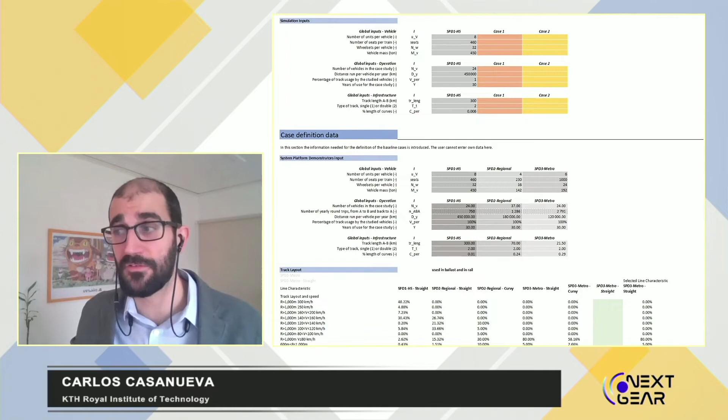If we go deeper - for instance this is the baseline case selection tab - you can see that as you go down, there are more and more parameters you can introduce. It's not really necessary to modify any of this, but you are allowed to, and the complexity has been built up so you can learn as you read and introduce different changes to your system.

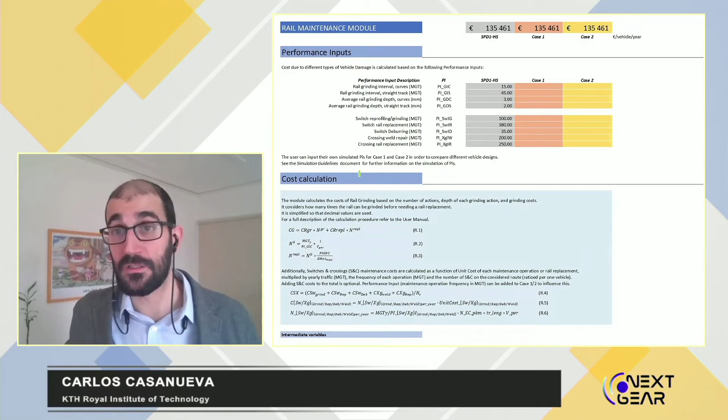One of the easiest modules is the potential hazards module, which doesn't have that many variables. We've used the different sections and subsections in a consistent way, so that when you go to, for instance, rail maintenance - which is much more complex, with performance inputs related to grinding, switch damages and so on - by this point all the different subsections are the same. They're more complex and have more information, but the sections are the same.

That helps a lot with comprehensibility and transparency. We also have pre-calculated things included that you cannot affect - those are pre-calculated for different SPDs. The information is there so you can see there's actually one reference to take into account, but for all of these cases the value of the SPD is always fixed, so you will always get the same result.

Then you can use case 1 and case 2 to see what the differences are. Maybe this isn't the best example because I'm comparing nothing here - they all have the same cost level.

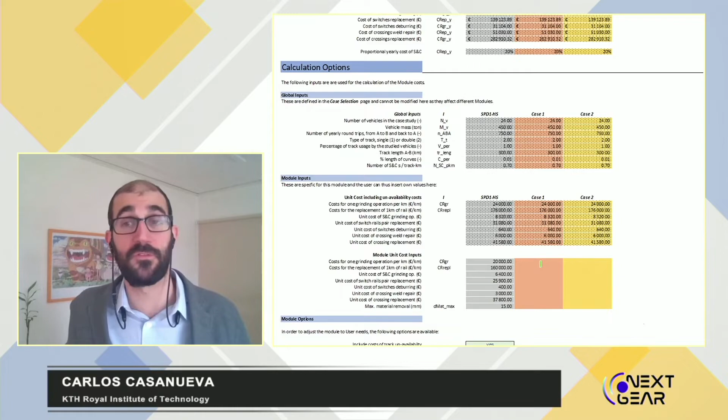In this final LCC slide, I can go back a little bit, because all these different columns - when empty, you can introduce your own data and your own variables there. You can modify the calculations one way or another by using those available spaces. If there's nothing input, the calculation uses default values; if the user inputs something there, that value will be used.

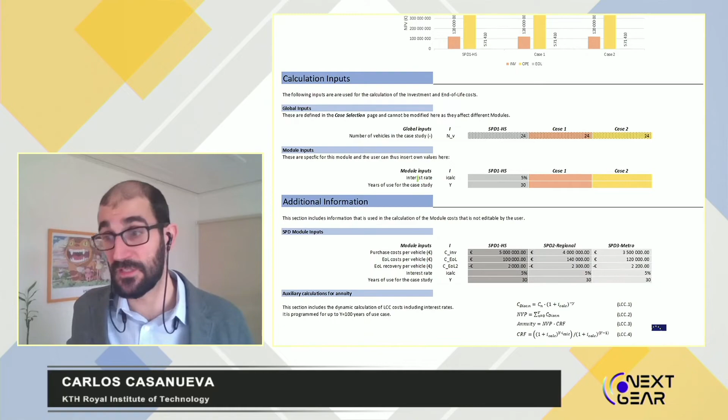You can also have an LCC cost breakdown. You can introduce the cost of the purchase plus the cost of end of life. So here is investment costs, operational costs, and end of life costs down here. You can see for the different cases that you analyze what that split is. The actual sections are similar or the same as much as we could, even in this last slide. So this is how the UCM looks like.

So we do have simulations on one side. We have the tool that will take the output of those simulations for post-processing into a certain cost value. But the thing is, we are analyzing innovations, and innovations are not necessarily existing at the moment. So we needed to come up with a simplified method of how you should think about your innovation in order to be able to first simulate what you need to simulate, obtain the performance inputs that you need to obtain, and not more, because you don't want to waste your time calculating other things, and then be able to do the cost calculations.

So we made a quite simplified method based on 3 stages. The first one is what's called differential feature extraction from your innovation. The second one is a causal effect diagram on cost generators. And finally, though this is not really necessary, it's nice to have an identification of system stakeholders and who is affected by each of this.

As an example of how you should think about this innovation modeling, in this specific case, which is the hybrid composite axle we heard about just before, the first thing would be, as we said, differential feature extraction. You need to know what the difference is, of course, from a conventional vehicle, from a conventional wheel set, to this type of wheel set. So you would have lower unsuspended mass, that's your main objective.

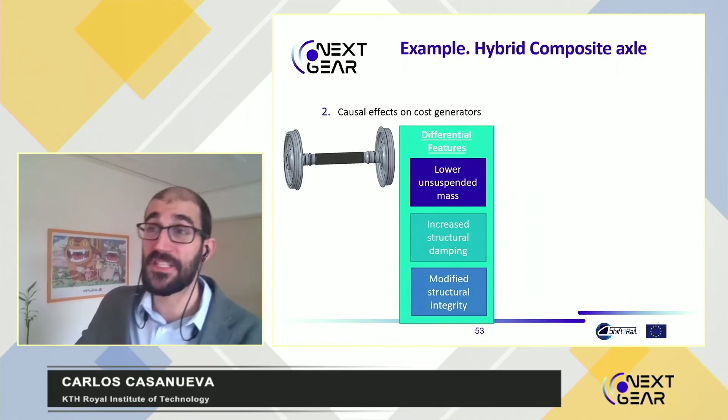The second step would be to do a causal effect on cost generators. What does each of these different differential features affect? Because you will need to simulate those. So in this case, you might think that you need to simulate noise because there is increased structural damping. But maybe with a deeper analysis, you find out that the structural damping is really not that much of this element, so then you can skip that analysis completely.

And try to focus on what is most important, which in this case, I guess, would be the lower unsuspended mass, creating less wheel damage, less infrastructure damage, and somehow less or a little less energy consumption for the whole vehicle.

Then these impacts do have some impact on costs, of course, in one way or another. And in the overall look, there is also, these are operational costs, but there is also a difference in initial costs. As an example here, we said it's 3 times more costly to build this kind of wheel set.

I don't really know if that's a precise estimation, but that could be it. You could have a much more expensive wheel set, and you will definitely have different end-of-life costs. We don't really know how much, but taking care after its life has ended of a composite material is usually much harder, much more costly than conventional metallic wheel sets. So it's not only operational costs that are changing, but also the others.

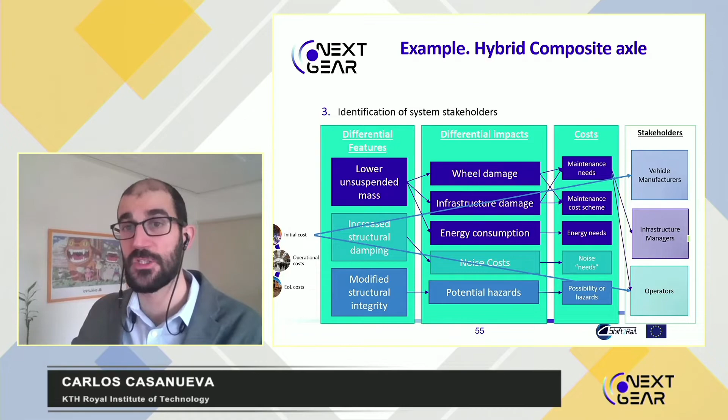Finally, it's interesting to understand what stakeholders are affected by this. Maintenance needs would affect operators and infrastructure managers who will get benefits from it. But from these initial costs, the manufacturers will be manufacturing something that is more expensive, so it's affecting them in a way. The operators are paying for it, and the end-of-life costs are probably going to the operator. So there are a lot of different relationships there that are interesting to understand, even if it's not really necessary for the analysis.

This is an example of how you should think about innovations. If you come up with a new innovation that no one has thought of before, you would be able to do that process and analyze it. There is no button where you click and say we include this exact innovation in the UCM. That is not possible, mainly because of the wide variety of innovations that could be.

Finally, we did case studies to test this. The first thing we did was analyze baseline cases, because one of the main issues with the previous universal cost model was that it was lacking information. It was proposing simulation and calculation techniques that did not have a very thorough cost analysis or simulation before or behind them to showcase what they did. So one of our main focuses was to find all the information needed and simulate all the simulations that need to be done for each of these baseline cases.

And then we wanted to test these innovations, right? Or at least they have been saying before me that these innovations in Work Package 2 and 3 will be showcased in the universal cost model in the end. Well, this is the list of innovations that we intend to cover for the final report.

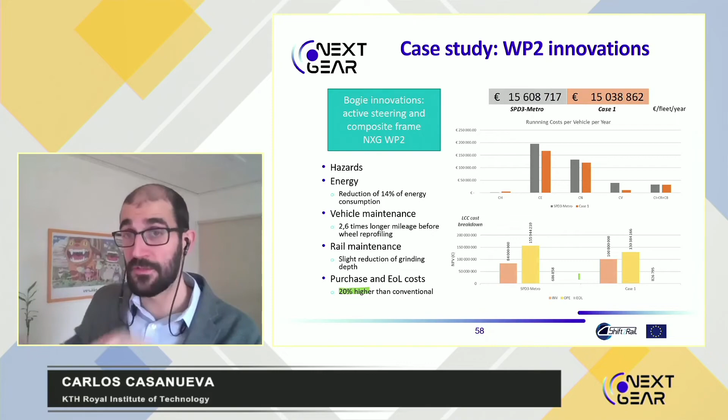And so one can analyze and scrutinize the different parts where the costs are going, what the different cost benefits are in different sections, and so on. For the wheel reprofiling case, basically it's analyzing how different strategies for wheel reprofiling affect this.

And the innovation here is not technical, it's just different kinds of reprofiling strategies. And it does not affect anything except vehicle maintenance, right?

So for vehicle maintenance, the first thing would be to simulate the wear of the wheel sets in order to have this trend and be able to analyze it.

In this case, what we analyzed was the limit flange thickness and flange thickness after reprofiling, combinations of parameters. So with these two cases that we were comparing with different parameter combinations, in a way, it's kind of the optimal one and the worst one.

You could have a difference, according to the UCM methodology, between the conventional one and the optimal one of a quite significant amount. I was going to say double, but it's slightly less than that.

And now we have discussed everything in a way until we reach some economic values. And the question now is, are these economic values okay or not? Can we validate somehow that these engineering methods work? And then I would like to give the word to Andrew Smith, who will be discussing this.

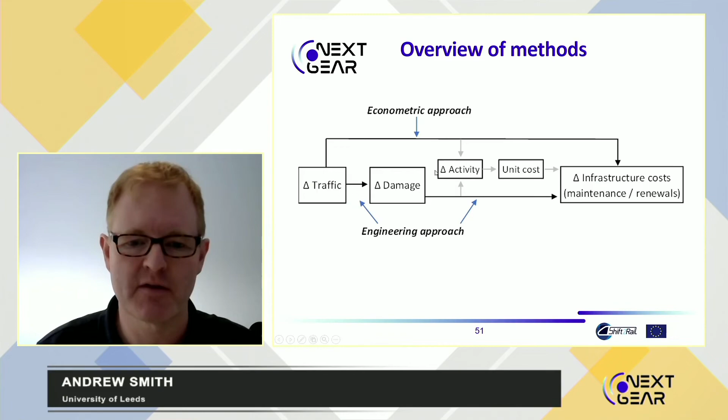The engineering approach, in contrast, works the other way, from traffic through to activity and intervention levels to correct damage, and from there, using a set of unit costs for the remediation activities needed to correct damage, effectively models the infrastructure cost. Underpinning the engineering approach is a lot of information about engineering understanding, judgment, and also looking at data on what actually happens when you change traffic and how that affects maintenance interventions.

Okay, so we wanted to look at how these methods compared, and indeed we had a few hypotheses as to why the results of the two different methods might be different.

And the first one was a little bit about the sample selection. Typically in econometric studies, we get data on all of the sections across the entire network, maybe excluding some of the very peculiar ones where there's not really any traffic, or they're just sidings, or they're not part of the main network. But broadly, we would take the entire network and estimate the model.

Engineering methods tend to use representative sections, or in this particular case, the TU Graz model is based on a selection of 70 out of 192 sections in Austria. Broadly, these can be seen as the higher loaded sections. There is a rationale for the selection, partly around data availability, but also the fact that once you get above a certain tonnage level, you'd expect the only thing driving maintenance from an engineering perspective would be traffic, because you would reach the threshold required for a maintenance intervention before any kind of time-based maintenance was required.

So that was part of the rationale for that selection. However, this does raise a question as to whether the results from that 70 are applicable elsewhere in the network. A particular issue we'd be interested in is whether, as you look toward a broader set of sections, you're better able to exploit the variation in the data and see what happens with much bigger shifts in traffic. That might particularly affect preventative maintenance regimes, which can move in steps as you move from lightly loaded

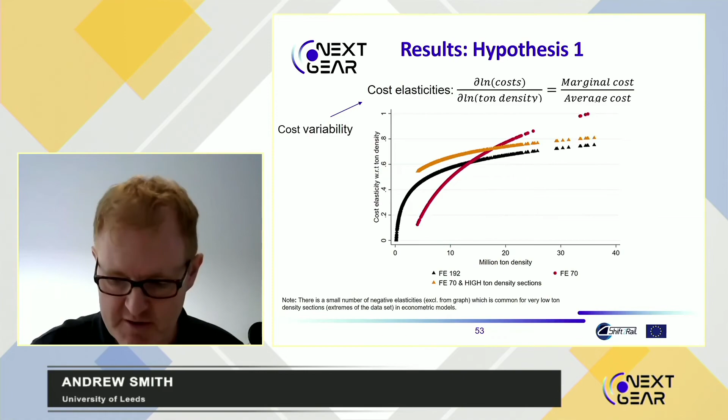And perhaps the broad point to take from this is that, first of all, the numbers are rather similar. So in one sense, we can say the econometric method provides some good cross-validation for the engineering method that's used in the UCM, which is helpful.

So whilst the numbers are slightly different, they're not greatly different, and certainly compared to previous comparisons, they're much closer than in previous comparisons. But there are a few points to explore further.

I also just mentioned briefly one methodological wrinkle that we need to fully iron out: potentially the engineering method is producing a measure that's more like an average cost. So actually here it looks as if the econometric model has a bit of a lower cost than the engineering model. I think once we resolve that point, it probably will slip slightly the other way. The econometric method will look a bit higher, but overall, the methods are looking relatively similar, but with some points to explore, which I will now touch on.

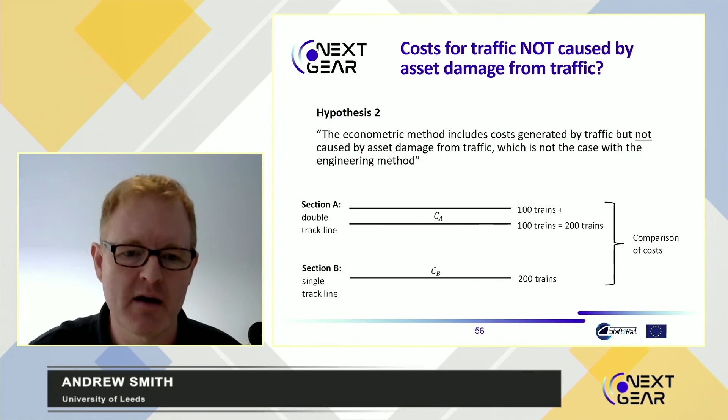And we've found similar results, it should be said, using data sets from other countries.

Okay, so a very, very quick summary. Past research has shown some quite big differences between econometric and engineering estimates. Now, I would actually highlight the VTISM model in the UK, which has considerably lower variable costs, and that partly motivated our research. But in fact, when we looked at Austrian data, the econometric and the engineering approaches produced reasonably similar results, but with some points that could be explored further, and we would produce some evidence on those as noted.

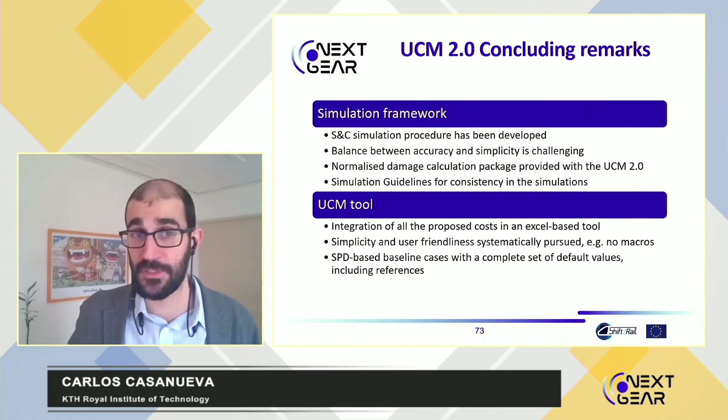I'm missing a point here on the econometric validation. We have managed to ensure, in a way, that there is a point to doing engineering methods like this, and that the results you obtain are comparable and adequate to a certain extent.

We had some dissemination activities: 3 conference papers, and 2 peer-reviewed submissions that are planned, more or less advanced. There was also a conference workshop on innovation modeling at the Resource Efficient Vehicles Conference.

For further work, there is an extensive need for peer review of the tool. It is a very complex tool with lots of nuances and parameters, so I cannot ensure that we did everything perfectly. We will gladly share the tool in order for it to be peer reviewed.

A simulation-based add-on for ballast settlement damage is also required in a way. The partners in Pivot 2 have insisted that ballast settlement is not influenced at all by vehicle design, so why include it at all if the tool is for analyzing vehicle design? We agreed we could run some simulations to test if we can adjust or include the dynamic behavior of the vehicle in that proposal, but we didn't have time to carry it through. Hopefully we can do it afterwards.

There's also the validation of a non-iterative wheel damage calculation method. There's been a big discussion on whether an iterative method might be too complex, but there are no real non-iterative methods that have been peer-reviewed or shown results out there. So a big project or work on this is needed.